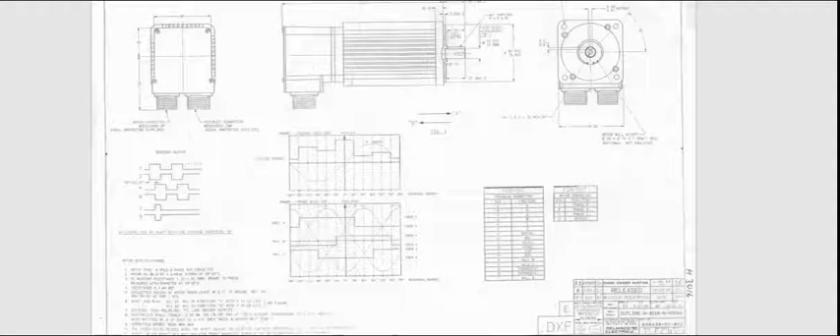So the first thing we need to do is to put in the motor data, and that you can obtain from either the nameplate on the side of the motor, the data sheet that came with the motor, or in our case our archive. We've taken this motor out of the stores, and there's the data sheet for it, and then we've gone into the motor settings here and entered that data into the Copley environment motor data setup.

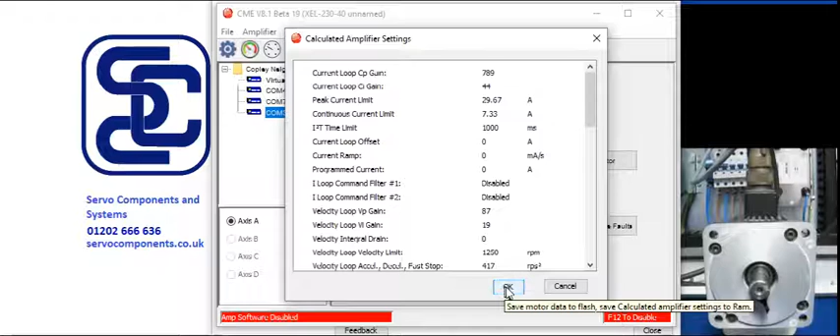So the first thing we need to do after we've done that is to calculate the amplifier settings for the initial settings to allow us to rotate the motor in a reasonably controlled way. We'll go back and tune it later, but this should get you going. So okay, we can go back there again, and we can save it into Flash, which we actually just did.

But also, sorry, one thing I forgot to do is enter the encoder data, which I've already done previously, but that is a 2000 line encoder, which translates to 8,000 motor steps per rev of the motor. Okay, so that's that bit done.

Next thing we should do is to tell the drive what sort of system we're going to be tuning and configuring. So it's a brushless motor, it's a rotary, commutation is sinusoidal, that could be trap, but we've picked sinusoidal. We've got halls selected this time, digital halls, which are 3 switches to help you commutate the motor. We've got a motor feedback, which is primary incremental, as I've just said.

We haven't got a load encoder, and we've got a buffer output port, which retransmits the motor encoder if we so wish, but we're not using that. And temporarily I've got it set into position program mode, and we can change the settings if we wish to. Okay, so that's okay.

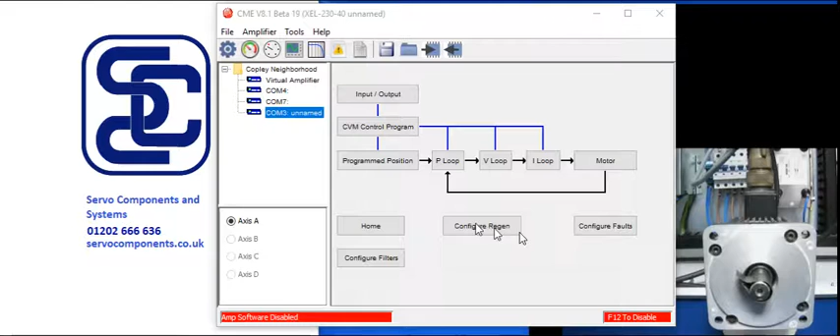Next thing we should do is do an auto phase. This time it's going to use the halls to do the phasing, so a slightly different process to the last video, but we still need to rotate the motor in the direction we wish to be clockwise. So I've just done that now, and we get a count on the screen showing us that that's the positive direction. And now I'm going to hit next, which brings up this other window.

So that's okay, it's taken the values that it calculated, and we can hit start, and it will check the motor phase wiring and the Halls wiring. So it's come back and said, okay, test complete. That's okay. Now we can go to the next stage, and this is now going to check that you've got the poles and the encoder settings correct.

So hit start again, and it'll ask us to observe the motor to make sure it does 1 rev. So if we check that now, it's about there. Okay, it's going to do 1 rev, and hopefully it'll stop back here again.

Stop. There we go. Lovely. So did it move 1 rev? Yes, it did. And it confirms the number of poles and the counts per rev. So we go next. And this time it's just going to check the Halls.

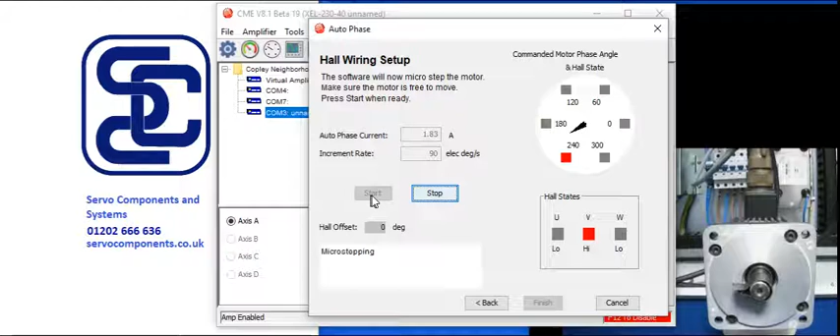So here we bring up a pictorial of the Hall states and commanded motor phase angle. So here we go. Start. Okay, so that's passed. And that's it. Finished.

Okay, so what we should better do now is go into control panel, and with the settings calculated, we should better enable it and do a forward, a reverse. Oh, that's interesting. Right, okay. What you didn't see was that it was originally set in EtherCAT mode, and I didn't do a power recycle.

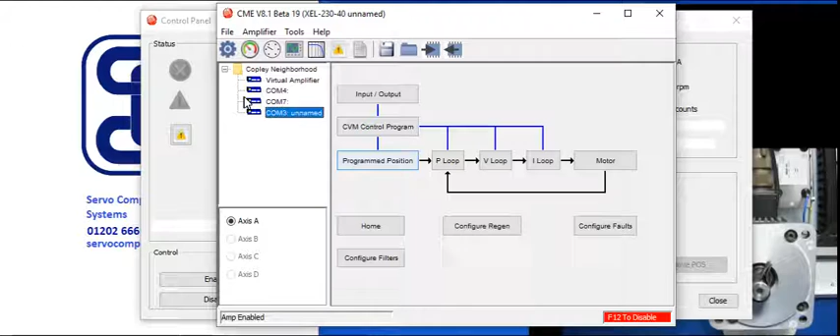So I'm just going to close that. I'm going to save that into Flash. I'm going to do a reset. So I'm going to lose connection for a bit. I've already saved everything, so I don't need to do it again. And it's resetting the drive right now. We're going to come up with a lost connection in a moment. That's interesting, it didn't. Never mind, that's good.

So we're going to go into control panel again. Enable. There we go, it's right this time. So what was happening there, it was set in EtherCAT mode, and therefore it was looking at the software commanded direction bit within the EtherCAT interface. So I just got it confused there.

So that happens actually when you're switching from this mode into EtherCAT mode. So be sure when you change the settings that you do a power down and recycle. So there we go. So next one in a moment we'll go and do a check on the tuning. Thanks very much, and I'll see you in a minute.

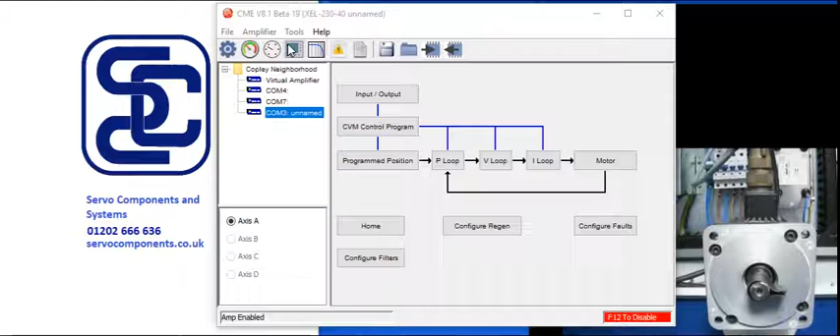So now we're going to check the tuning, and remember we've not tampered with any gains at all at the moment. We're purely using the settings that the motor calculator worked out for us. So if we just check it, we can go to oscilloscope mode up here and select current. Auto setup is on, then we're going to get commanded current and actual current, and hit start.

And here you can see that actually it's tuned it. So it's set it on the side of caution, so it's a bit soft. But nonetheless, as you saw earlier, the motor did turn. So that's what you would get automatically out of the box, if you like. So if I stop that now, close. What we can do is an auto tune. We could do it manually, but let's just go through an auto tune procedure.

And here we go. I'm going to hit auto tune down here, and it'll go through all the settings, so from CP 0 up to CP 1000 or something like that, and then it'll increment through the CI again, and eventually we will get an optimized current loop. So it takes a bit of a while. Here we go. And you'll actually hear the motor buzzing at this stage, which is quite normal.

One thing I should say while we're doing this is that I've got it nicely perched on a reel of tape. In an ideal world, obviously this would be in the machine or clamped down onto a surface, so that when you do some violent moves, it doesn't actually roll off the table and cause damage. So I'd highly recommend it's clamped down. So don't do what I do, do as I say. So here we go.

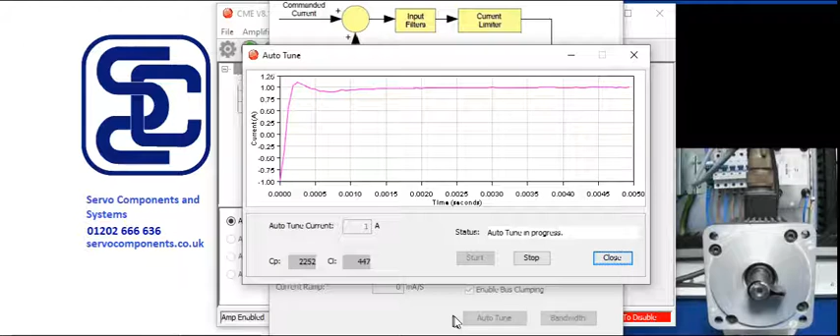Now obviously we've got auto tuning current of 1 amp, so what we're looking for is a nice slope, a little bit of an overshoot, a little bit of an undershoot, and flattening off at 1 amp. So we're nearly there now. So it's just backing off the CI now, just to try and find the sweet spot. And now it's just working out the bandwidth.

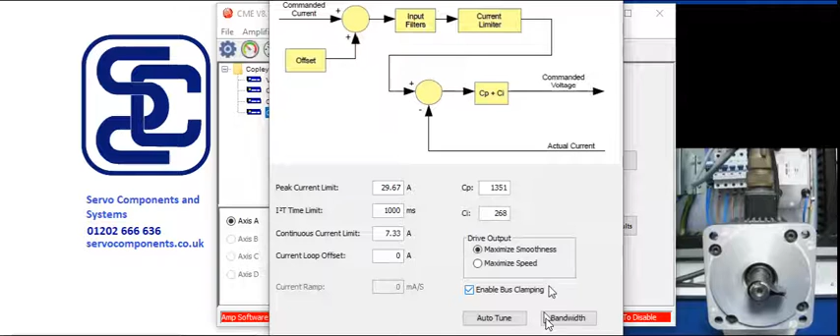Okay, so I'm going to accept that, close that, close that, and now I'll go back to the scope again and change that, and now just run. Put 1 amp in there. That's what we tuned it to. Start. There you go. So already you can see it's much better than the calculated values.

Now we can go into the gains here and increase the gains a bit, just to bring that up a bit if we want to. Increasing that. There we go. So I'd be relatively happy with that. Stop. Okay.

So click the auto setup, so when I change the function generator to velocity, we change the scope settings. You might want to change these to the values that you're more likely to be using in your application, but I'm going to leave it there and hit start, and this time you'll see the motors moving in a velocity manner. And again, okay, so not quite getting there, so we can play around with the gains here.

Double it maybe. Okay, so that's making a lot of vibration there, so that's far too high, as you can see on the scope as well. So that's not what we want, so I've reduced it again. No, so it's set itself off, and okay, right. So now we'll just try and bring it up a little bit, add a bit of VI, integral.

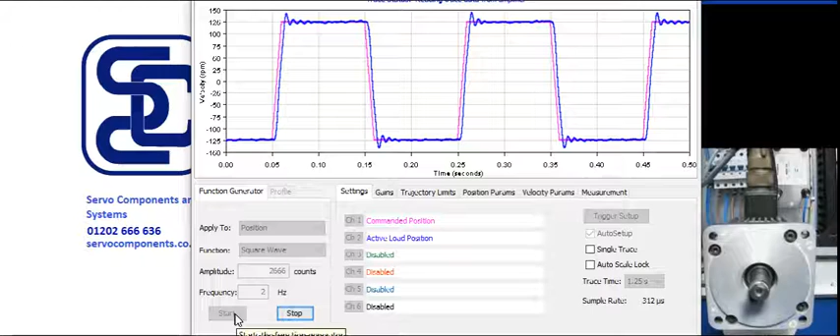You can play around with this for ages, and of course you'd need to do it again when you've fully loaded on your machine. You might want to tweak it. So we're going to leave that there for the moment, and this time finally we're going to go to the velocity loop. Sorry, the position loop. Again, it changes for you, and hit start. There we go. Not bad at all.

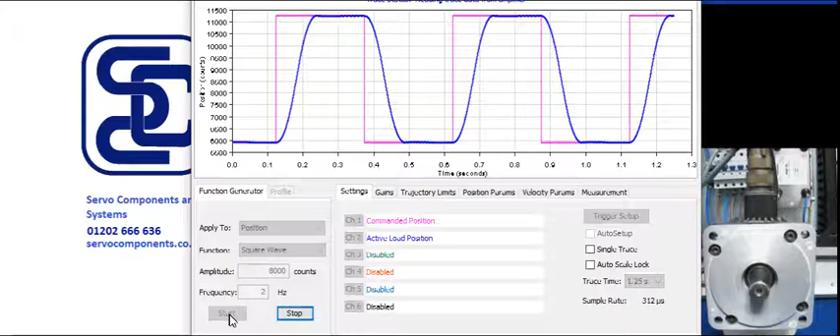Just to show you that we're doing 2,666 counts per rev. I've actually changed that to 8,000. Then we should get 1 rev when we do it. Okay, and of course, because I'm going further, if I stop the trace, we may want to extend the period of the trace. So now we should at least get a flat period. Sorry, gone the wrong way, haven't I? Change that to 1 hertz. That's what I should have done.

There we go. So what we're actually looking at here is the commanded position. And in fact, if I stop this and add position, limited position, this then will display the acceleration, commanded acceleration, based on the trajectory limits. Okay, so if I run it, we'll see that actually that slope, there we go, follows almost precisely the actual commanded limited position shown in green. So if I stop that now, you can see, look at that, very, very, very close.

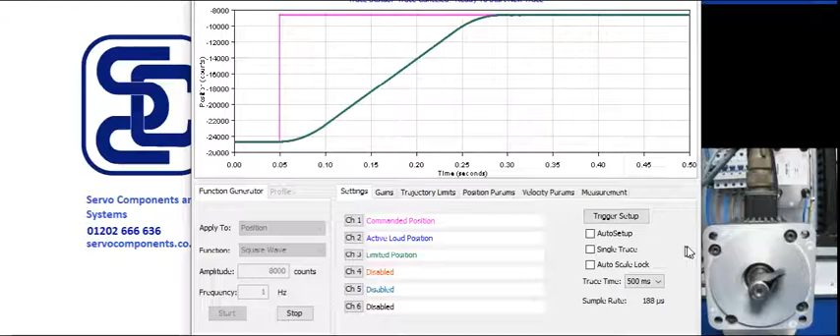Okay, so that's that. And next we'll move on just to show you what you might need to do to help you debug, assuming none of this works. What do you do? How can you get some help from the drive? And we'll look at that next. So what sort of things can you do if none of that worked? It's all very well, and I've been there myself. You're showing it all working, it's all lovey-dovey, all works. But then when you do it yourself, you get it out of the box, and it doesn't work.

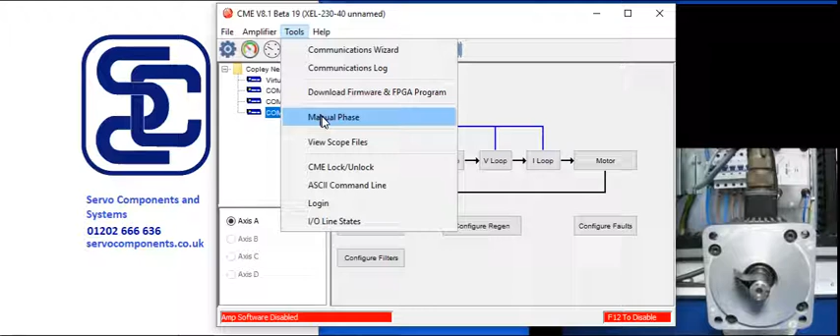So there are a couple of tools that you can use, and we've shown them briefly. One is the control panel, and the other one would be the manual phase. So if you've got halls, and the halls aren't working, then obviously you're not going to get the motor to rotate. So I can use this panel, and because I know it works, I can demonstrate it here without getting off my chair. Here you've got the hall states, and we've got W on and U and V off. These will go through a sequence of 6 steps, and only one will change at any time.

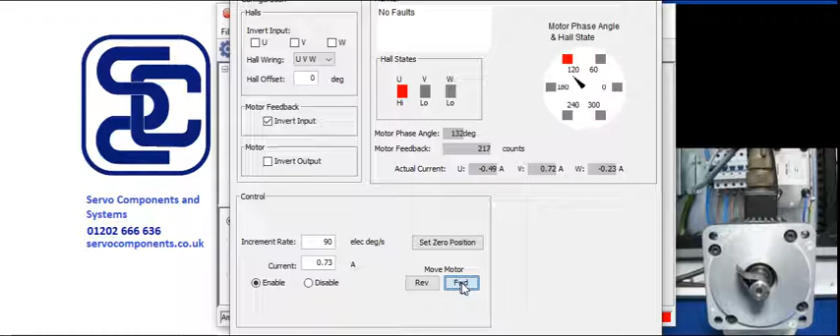So if I run it around slowly, you'll see that there we've got U and W on now. And now, if I carry on going, W will go off. Okay, now we've only got U on. If we go a bit further, now we've got U and V on. Then we'll have it so that only V is on. And then we get V and W on. And then we've got W on, so we're back to where we started. So if you don't get that sequence, then you will not get the motor to turn properly, assuming you're using the halls as your commutation. So that's one thing you can do.

If we go to the control panel now, we've got active position, and if I zero the counts and look here, you can turn it by hand, but because I've got power, I can make it work. If I do 1 rev, you'll see the count come up. If I get back to where I was, which is roughly there, you can see we've actually turned 8,000 counts. So if it's a 2,000 line encoder, times 4, 8,000.

So if you've entered the wrong value, or the wiring is not correct, then again, you'll have trouble rotating the motor under control. Okay, so what you also get on this screen is your status, and all these have got to turn green at some point. They've all got to be green.

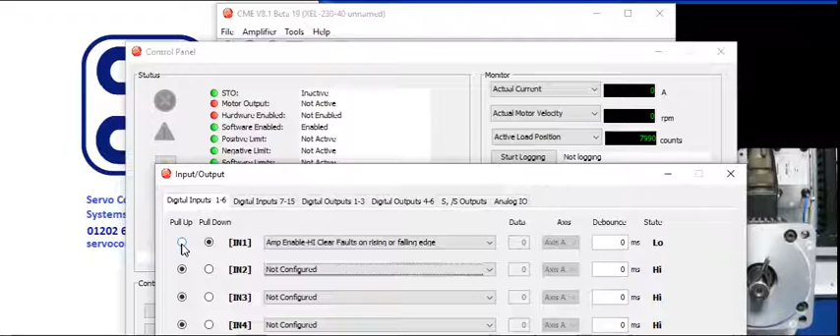The other one is the software enable, and the software enable bit comes from, well, here I can enable it and disable it here, as you can see. But as you saw earlier, I had it configured at one point in EtherCAT mode, and it was also getting its enable from the EtherCAT interface, which is why I couldn't jog it negatively. It always went positive because the direction bit didn't change.

Then we've got positive limits and negative limits if they're set. Again, they can be set in hardware. Somewhere here. We passed it. There we go. And you've got the option of hitting the switch and powering down, disabling the drive, or you can click this bit here, which is just off the screen, and hold the position, so it won't power down. So it'll allow you to drive into the switch and then stop, but it allows you to drive out of it again.

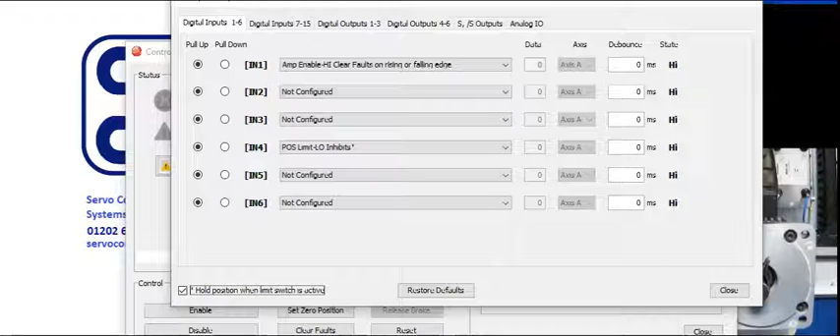So just a few things there to keep an eye on. Obviously motor phase is what we've been through, and if you haven't motor phased it properly, then that won't be active. So just a few pointers there to help you get going.

Right, one final thing is we can look at here a number of inputs. We've got looking at current, but of course to turn the motor, you need some volts. And this does allow you to monitor the bus voltage. So we're running on 230 volt AC, which relates to a DC voltage of around 320, 325 volts. So again, if there's nothing here, then it's not going to run. Okay, so check your wiring.

Okay, so we're going to close that, and I think that's probably it for the moment.